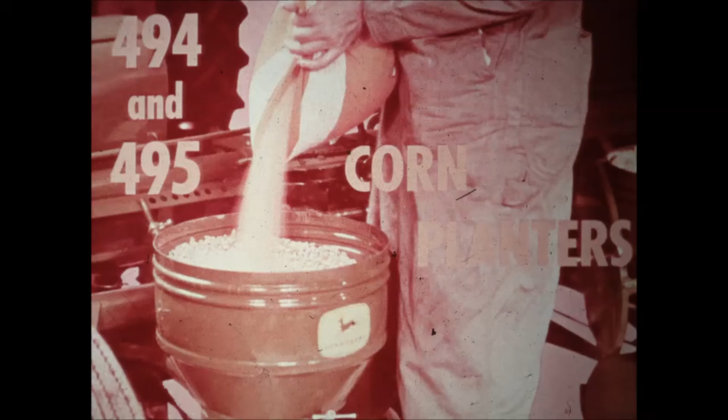When you pour your seed corn into these hoppers, you know it'll be planted the way it should be to produce rewarding yields season after season.

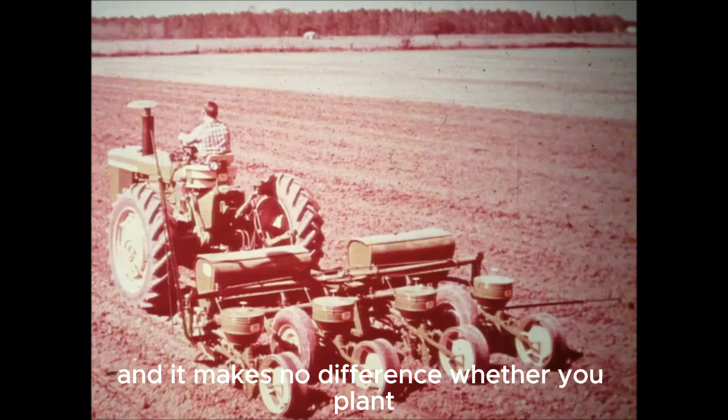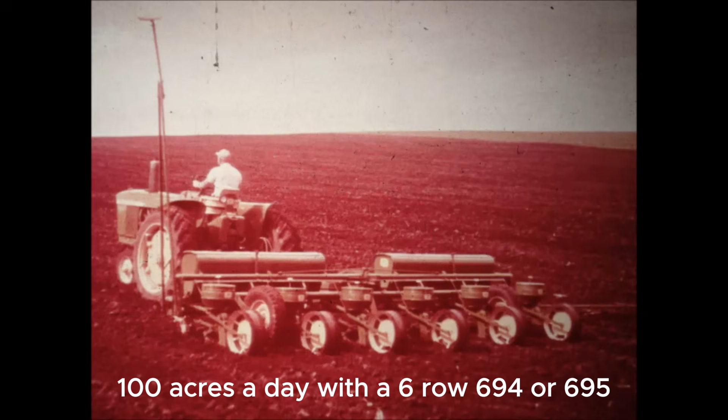It makes no difference whether you plant 75 acres a day with this pace-setting 4-row 494, 85 acres a day with this lightning-quick 4-row 495, 100 acres a day with a 6-row 694 or 695, or 120 acres a day with two 4-row planters, a 2-planter hitch, and a new generation John Deere 4010 tractor.

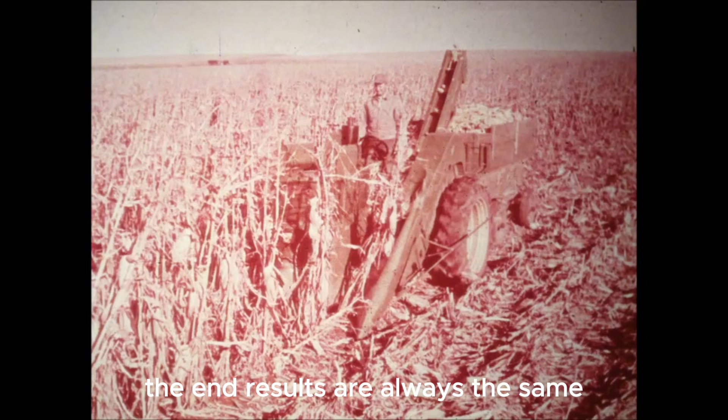The end results are always the same: full, uniform stands, high plant populations, extra bushels at harvest time. Let's take a closer look at the John Deere 494 and its high-speed twin, the 495.

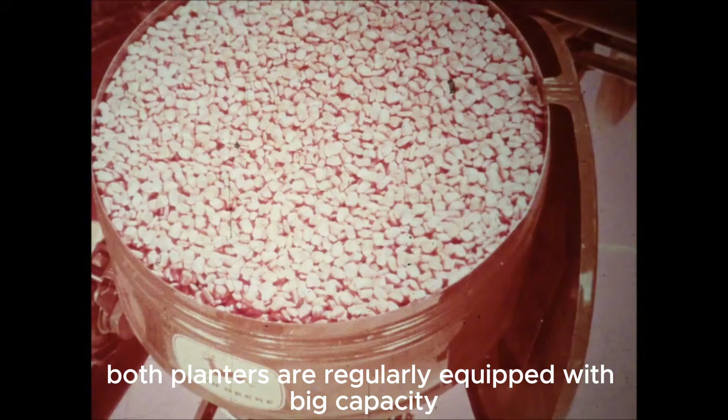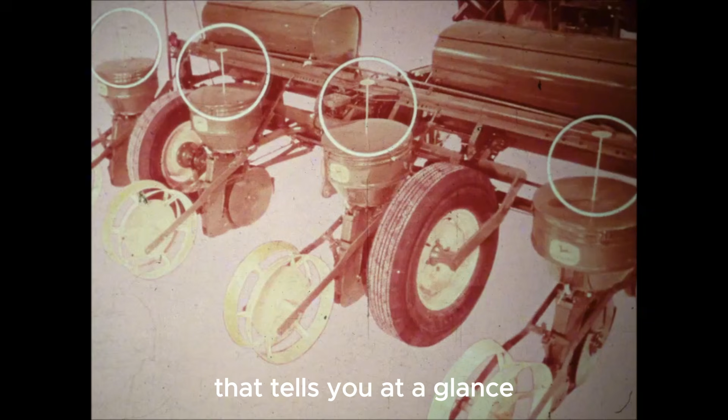Both planters are regularly equipped with big-capacity 3/4 bushel seed hoppers. Each hopper has a float-type seed gauge that tells you at a glance how much seed is left when it's time to refill. There's a steady flow of seed over these natural drop seed plates and sloping hopper bottoms into the cells whether planters' hoppers are full or nearly empty. Seed is never forced.

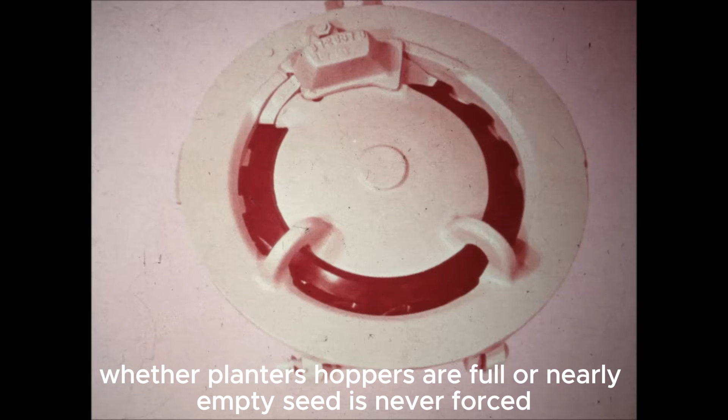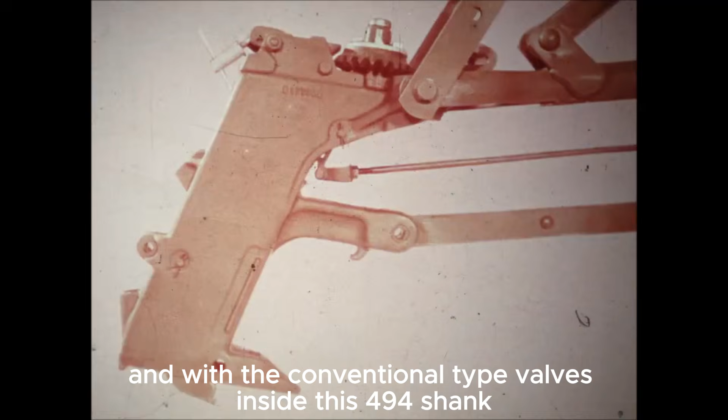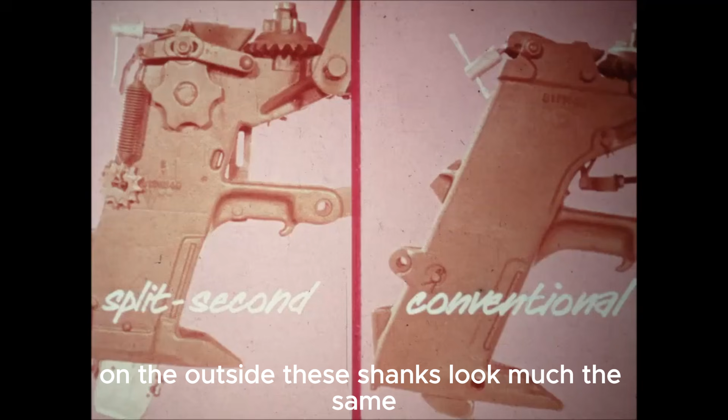Natural drop seed plates and sloping hopper bottoms work hand in hand with the split-second valves inside this 495 planter shank, and with the conventional type valves inside this 494 shank, resulting in outstanding planting accuracy for you and top yields. On the outside, these shanks look much the same, but inside there's a world of difference.

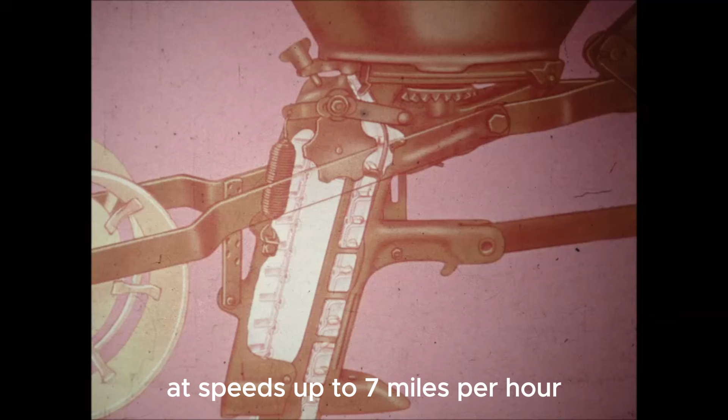The split-second valve is designed for drilling and hill dropping accurately at speeds up to 7 miles per hour. This special chain with small elevator-like flights conveys seeds from hopper down to the soil. Gravity is not used because seeds can't fall accurately enough to plant at 7 miles per hour.

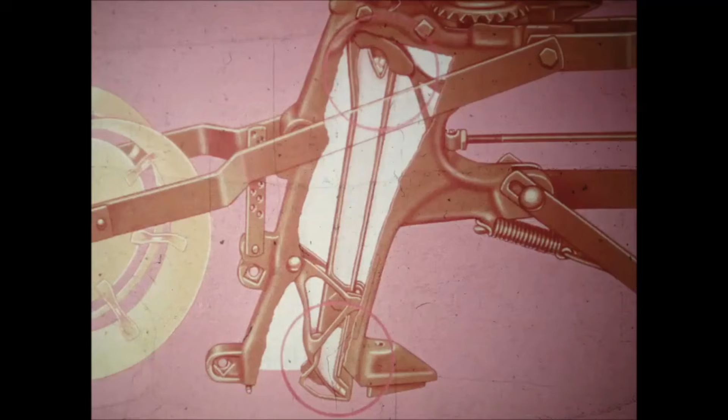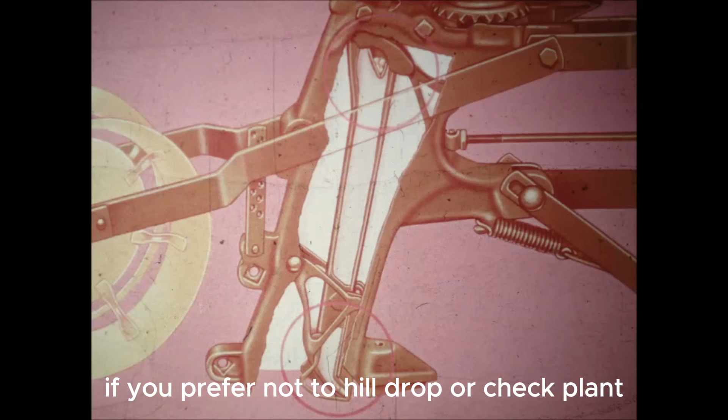The conventional type valve in the 494 is designed for drilling, hill dropping, and check row planting accurately at up to 5 miles per hour. If you prefer not to hill drop or check plant, you can buy a 494 equipped for straight drilling only.

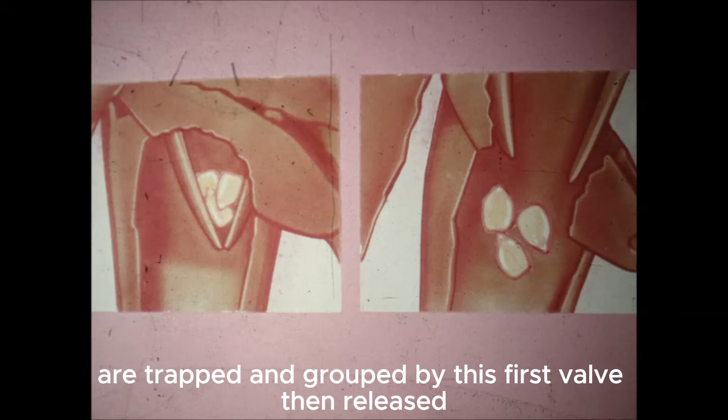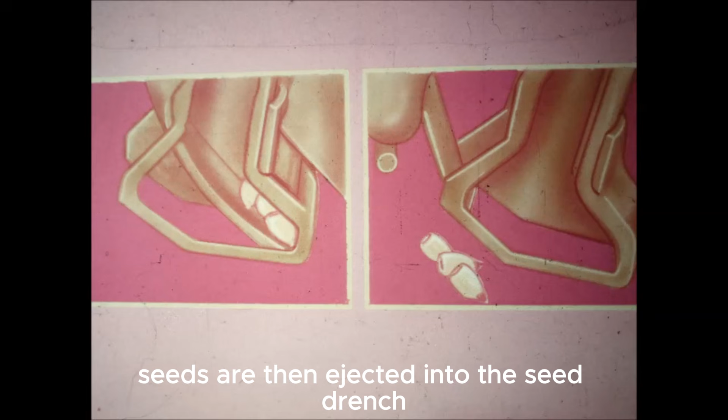Seeds dropped from the hopper are trapped and grouped by this first valve, then released, and regrouped near the bottom of the shank by a second valve. Seeds are then ejected into the seed trench. This double valve action ensures compact, tightly grouped hills and a near-perfect cross-check.

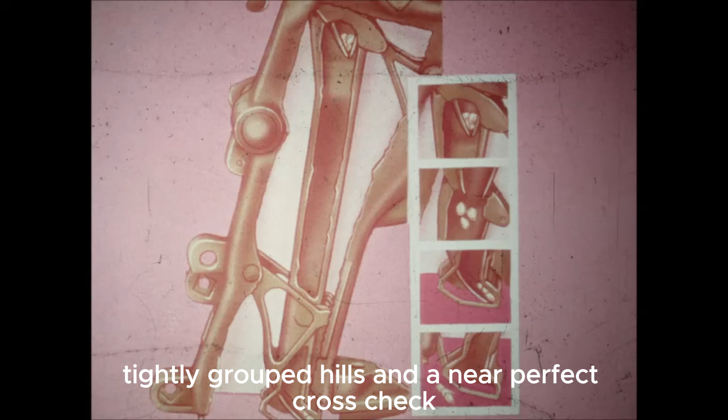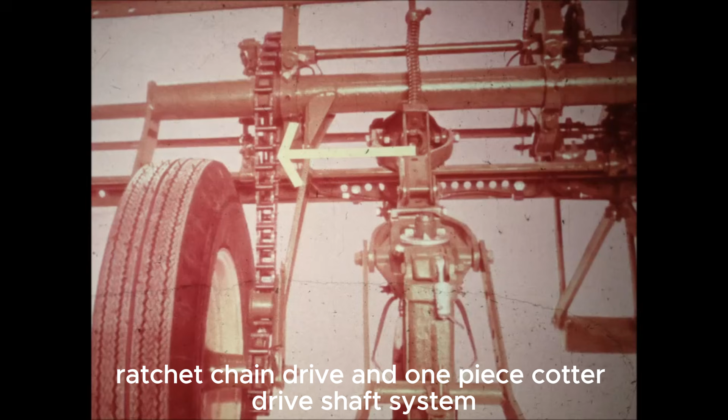A smooth flow of power from the planter's wheels to seed handling mechanisms is maintained by this backlash-free ratchet chain drive and one-piece cotter drive shaft system.

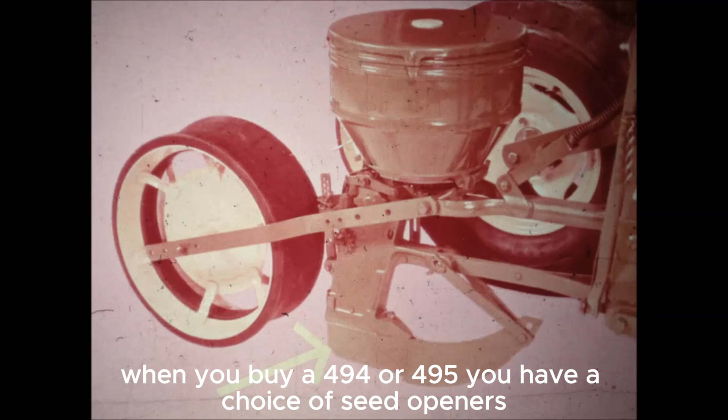When you buy a 494 or 495, you have a choice of seed openers, either this runner type or 14 or 11-inch double disc openers. Your choice depends on the condition of seed bed on which you normally plant.

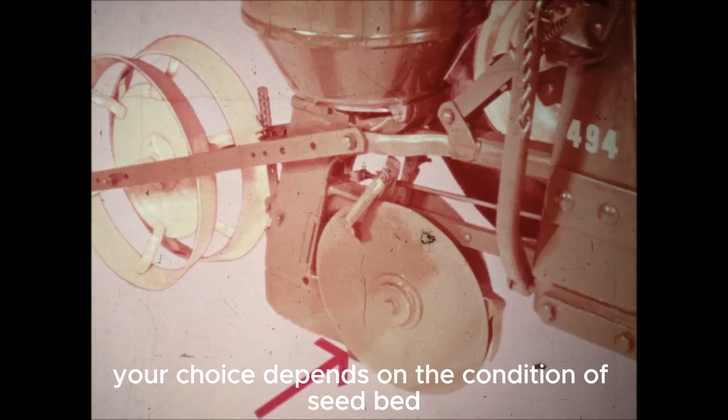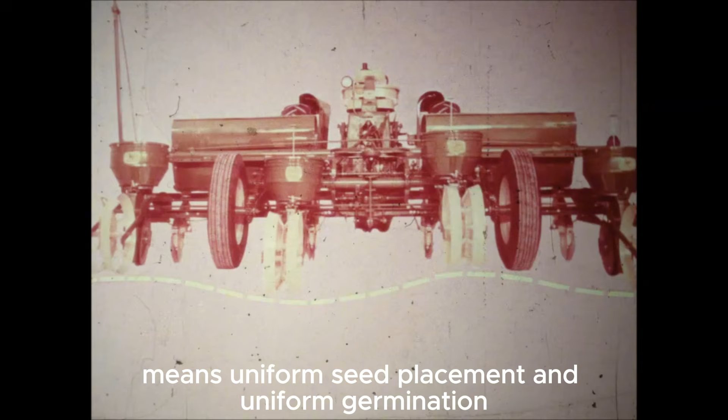Each planting unit is free to ride up or down over high spots and in depressions. This independent floating action means uniform seed placement and uniform germination. To make sure of proper penetration on firm seed beds, you can increase the pressure on each planting unit by adjusting this spring and still not destroy independent flexibility.

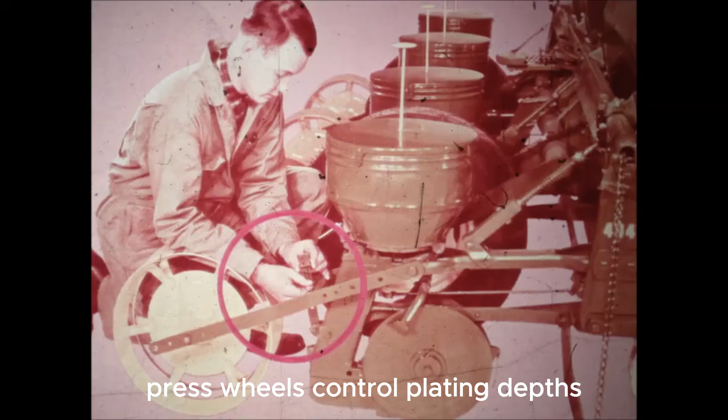Press wheels control planting depth. To change depths, you merely change this pin setting. No tools are needed.

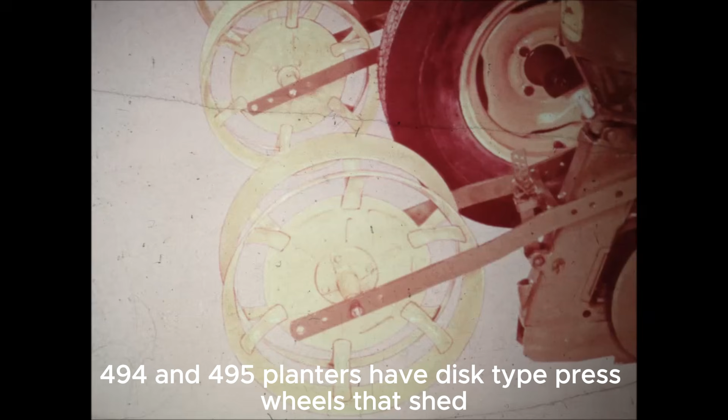494 and 495 planters have disc-type press wheels that shed stalks and trash. Wheels are smooth and rivet-free. Semi-pneumatic rubber tires are available for press wheels if you plant in sticky soil conditions.

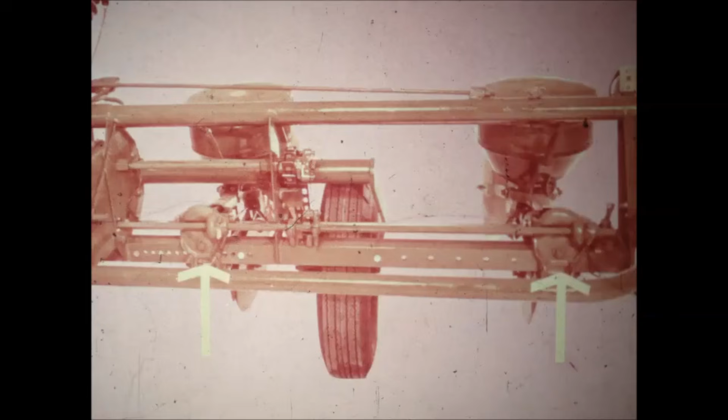Row spacing is easy to change. 494 and 495 planters can be ordered with 28, 30, 32, 34, 36, 38, and 40-inch row spacings. Special hoppers and markers are needed for planters with 28 to 32-inch spacing.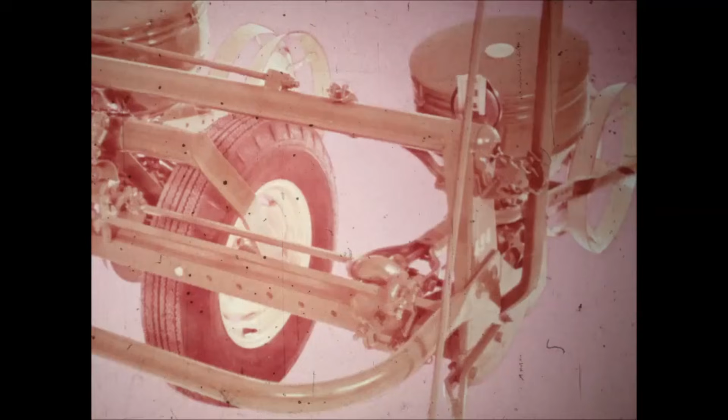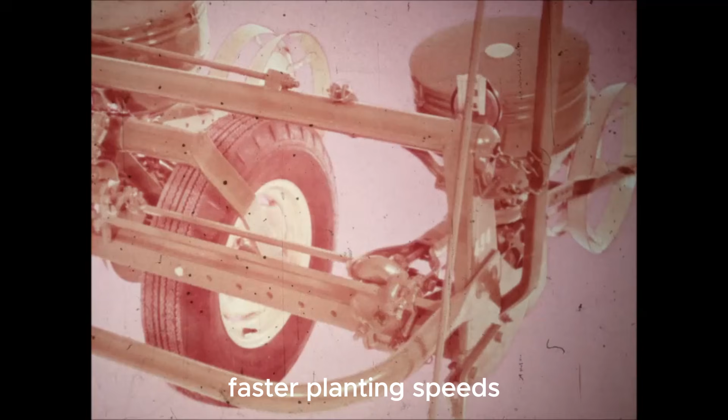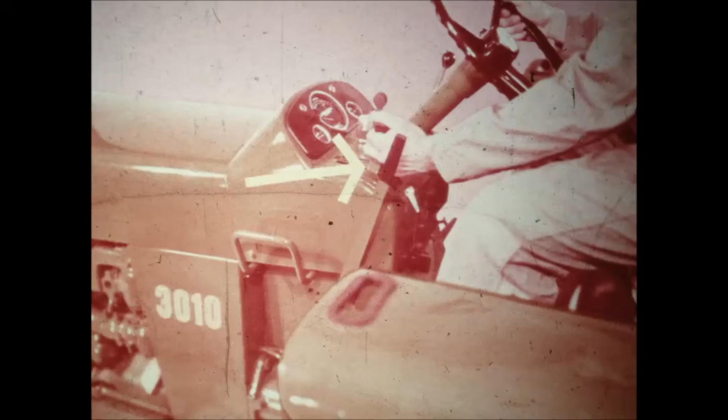Take a careful look at this rugged frame. It enables planters carrying heavy seed and fertilizer loads to take the hard knocks of modern, faster planting speeds. And this long pivoted hitch means that your planter will keep a true course even when the tractor wanders off marker line a little. A long hitch makes turning at row ends easier too.

You just pull back on the fingertip remote cylinder control lever on the tractor's panel to lift the planter, then spin the outfit around. When the planter is lowered, a hydraulic cylinder permits a cushioned drop, which prevents dirt from clogging seed runners.

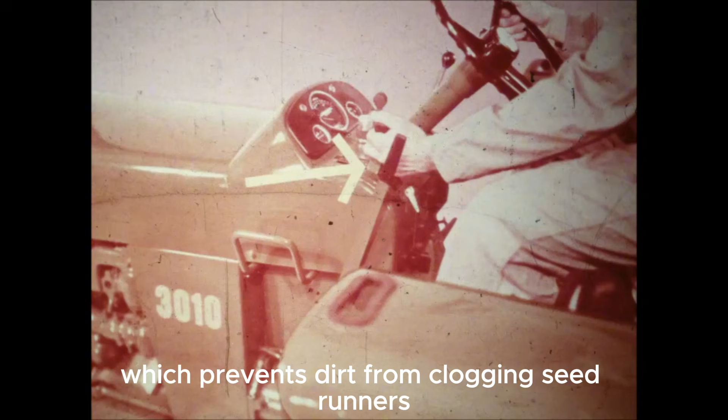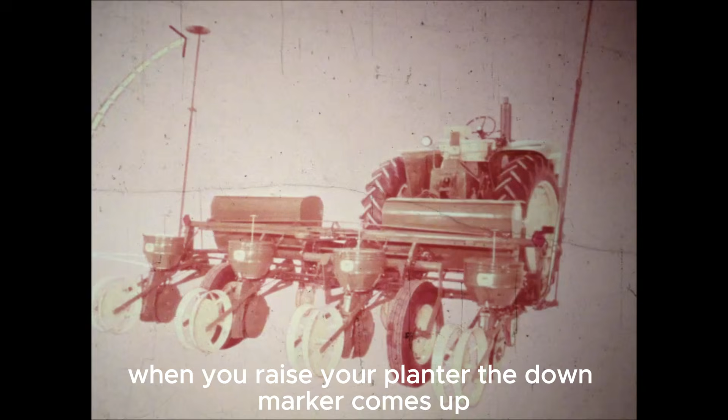You don't have to worry about these automatic disc type markers. When you raise your planter, the down marker comes up. If you make a sharp turn, the other marker drops when the planter is lowered. But if you just raise the planter to cross a waterway without turning, the same marker will drop again.

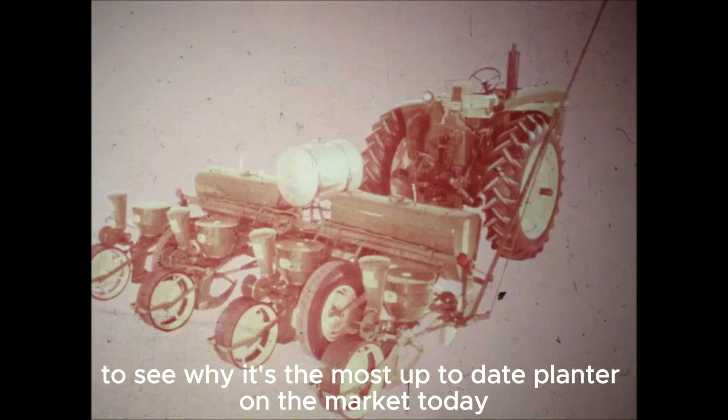Now let's look over a fully equipped planter to see why it's the most up-to-date planter on the market today. You gain many rounds of non-stop planting and fertilizing when you equip your planter with this dry fertilizer attachment.

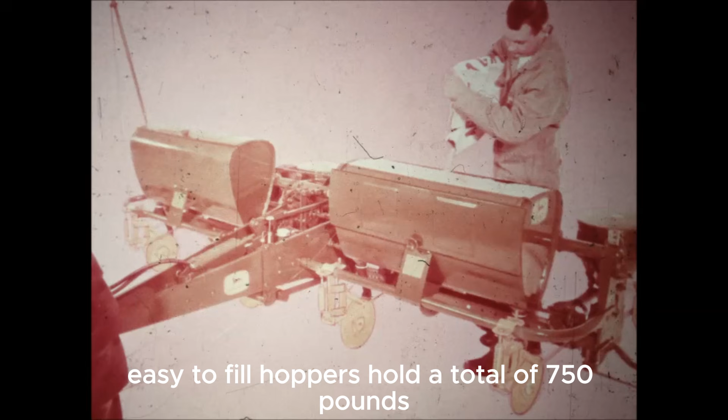These low-to-the-ground, easy-to-fill hoppers hold a total of 750 pounds. Large openings make filling fast. Less fertilizer is spilled whether you use bagged or bulk material.

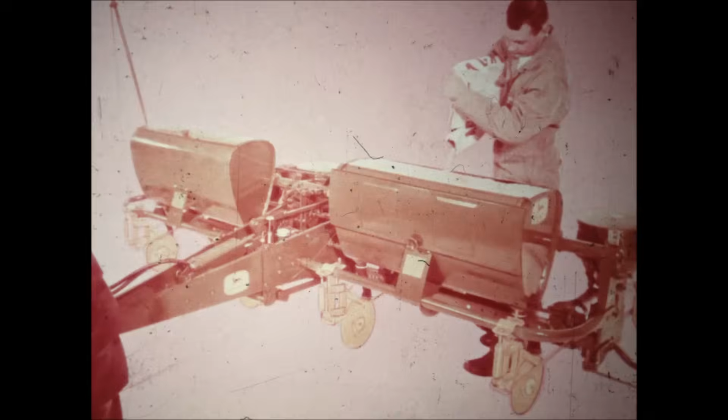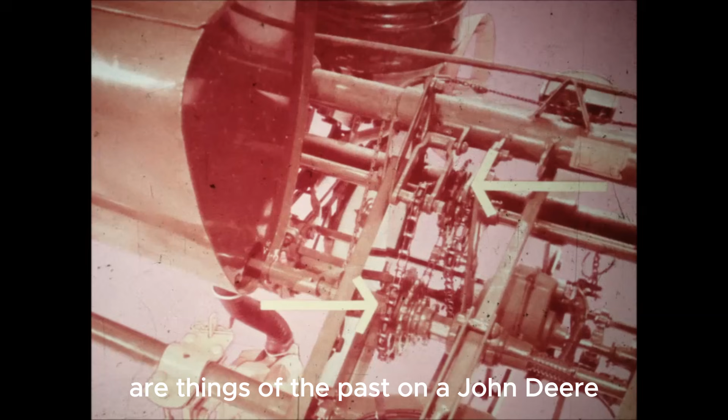Hit or miss fertilizing and fiddling around to get application rates the same on all rows are things of the past on a John Deere. One change of sprocket combination controls fertilizer rate on all units.

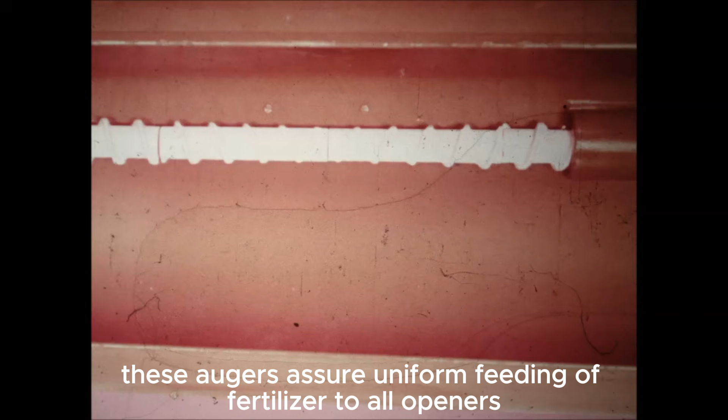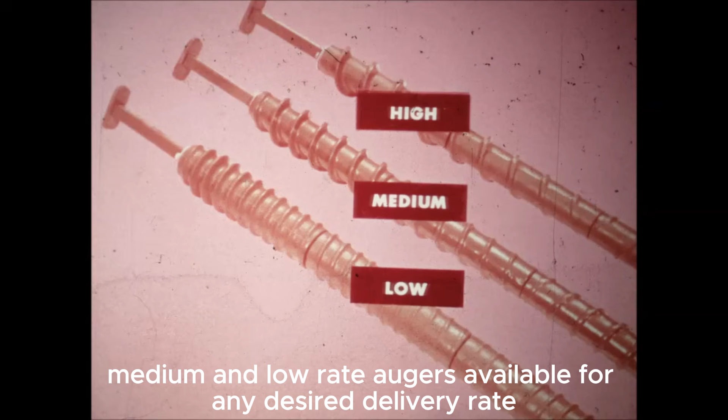These augers assure uniform feeding of fertilizer to all openers. They are easily removed so the tank can be thoroughly cleaned at the end of the season. There are high, medium, and low rate augers available for any desired delivery rate.

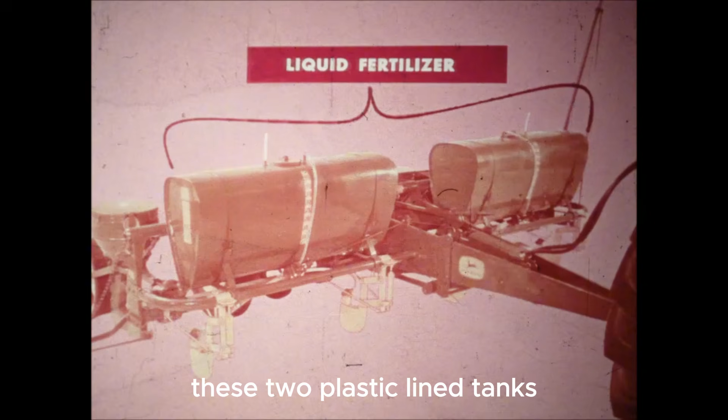If you prefer to apply fertilizer in a liquid form, you'll want to equip your planter with this big capacity liquid fertilizer attachment. These two plastic-lined tanks have a total capacity of approximately 1,000 pounds.

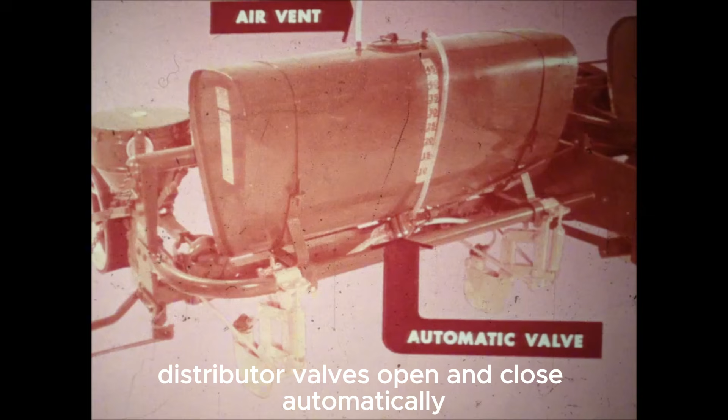Distributor valves open and close automatically when the planter is lowered or raised. Tanks are vented to give uniform head pressure necessary for accurate distribution.

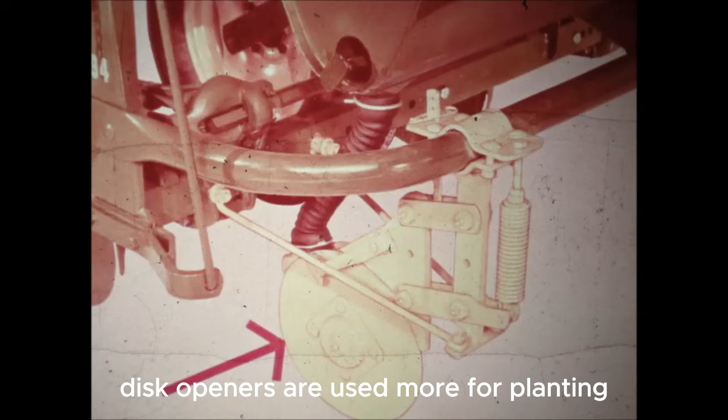Runner and disc openers are available for use with both liquid and dry fertilizer. The runner opener shown here is usually used when working in loose, mellow seed beds. Disc openers are used more for planting in soil where trash is a problem. Both types of openers have adjustable spring pressure for uniform penetration.

With a John Deere, you can put liquid or dry fertilizer to one side and below the seed where it's readily available to young seedlings' roots, and where leading authorities have proved repeatedly that plant food is most effective.

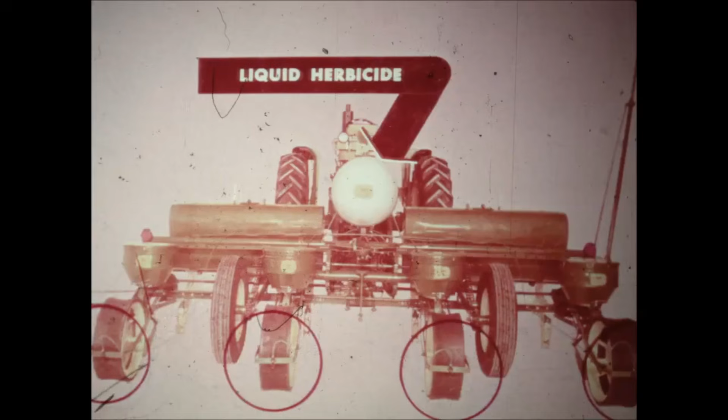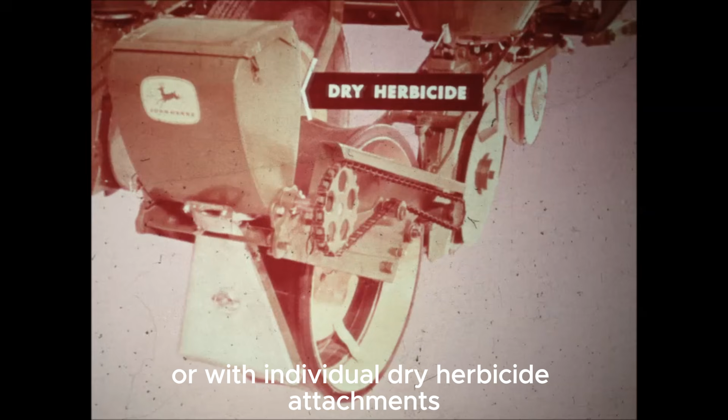The 494 and 495 can be equipped with either this liquid herbicide attachment with a 36-gallon aluminum tank and hoses leading to nozzles attached behind each press wheel, or with individual dry herbicide attachments with a capacity of 15 pounds per hopper. Fluted rollers feed out precise amounts of dry herbicide to assure economical weed kill.

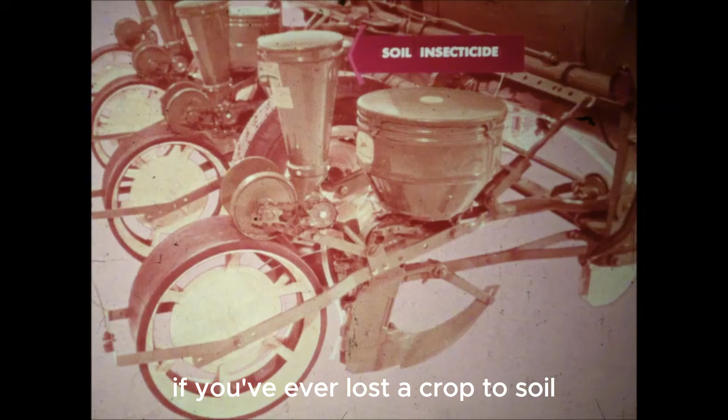You know the value of an insecticide attachment if you've ever lost a crop to soil insects and had to replant late in the season.

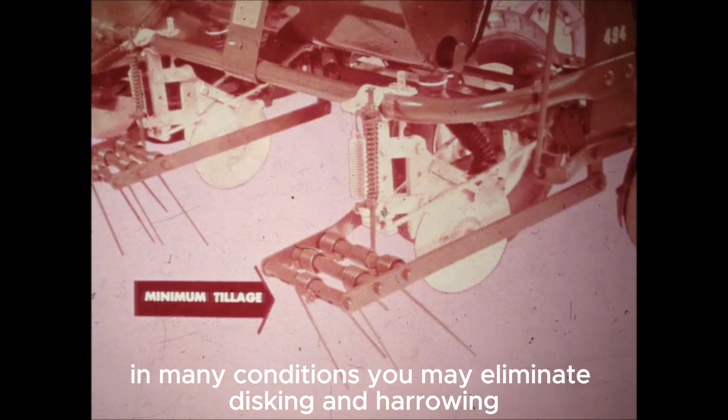You can plant corn in plowed ground with this tillage attachment. In many conditions, you may eliminate disking and harrowing, get a jump on weeds, and pare planting costs to the bone. Here's a sure way to get your row crops planted in the shortest possible time.

Plant 8 rows at once by using a 2-planter hitch and a 4010 tractor to pull 2 494 or 495 planters.

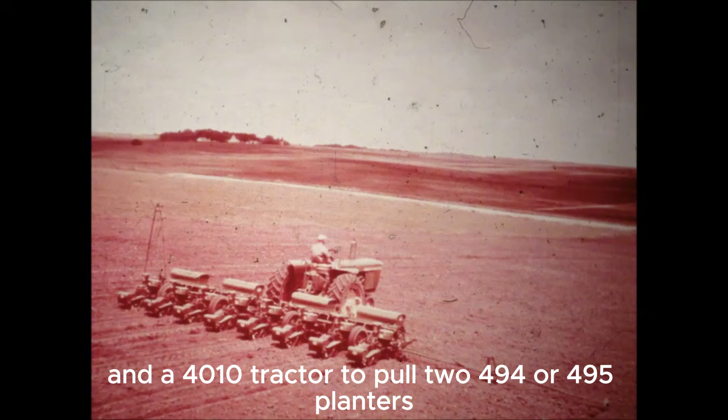Transporting an 8-row outfit is no problem. Planters simply trail one behind the other, narrowing overall width to 12 feet.

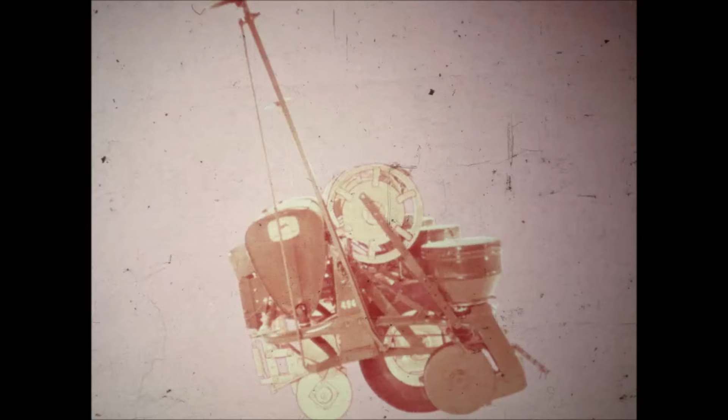You'll even appreciate the convenient way a John Deere planter can be stored, yet it is easily and quickly made ready for planting.

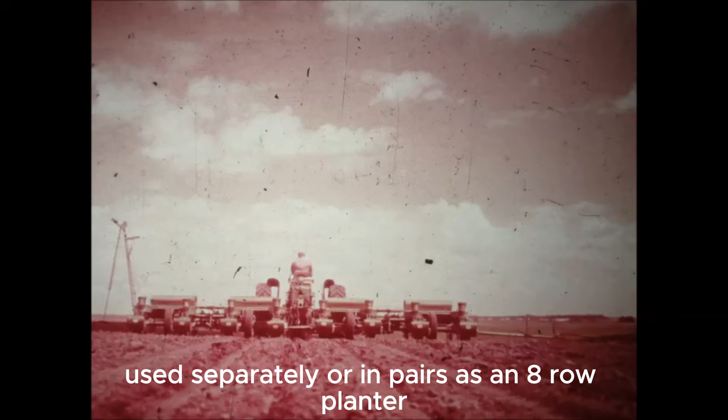Convenience, economy, accuracy, speed. Any way you want to make a comparison, John Deere 4-row 494 or 495 corn planters, used separately or in pairs as an 8-row planter, are your best buy today. Have us deliver a 494 or 495 before you plant another crop.